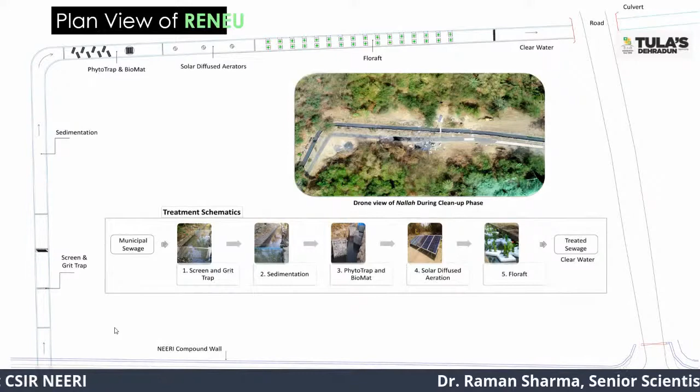And I would like to emphasize that when we talk about treating grey water, even in a sewage treatment plant, STP, you tend to remove the silt before it goes into the plant, because silt does not have any nutritive value. It's just an inert material that should be removed at the first instance, so that it does not put a burden onto the next operational units at an STP or even in the RENEU system.

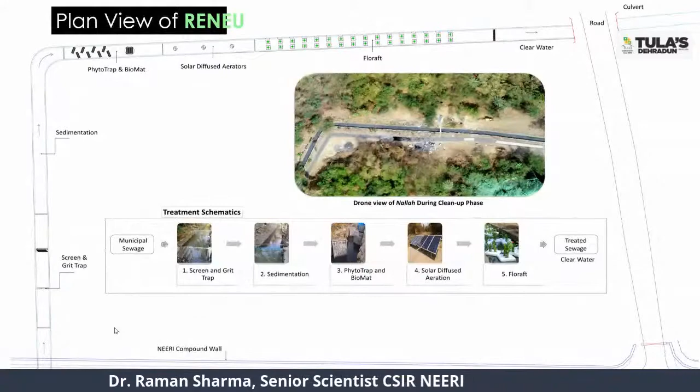So CSIR NEERI demonstrated this RENEU technology in its premises at Nagpur. CSIR NEERI has its head office at Nagpur, and there is one nala flowing inside the premises, and we demonstrated this RENEU technology inside our premises itself. This is the beginning of that nala before it enters near our office building, and you can see all kinds of solid waste being thrown into these nalas, which ultimately chokes them, which is not the behavior expected from the citizens of our country.

So let us talk about what we are proposing for a RENEU system in a demonstrative unit in our campus at Nagpur. This is the first physical operation: we have a screen cum grit trap. You can see our inclined screen has been put into the flow of water. So this screen and grit trap is the first unit for the RENEU.

The screen removes objects such as rags, paper, plastic, metals, and various floating matter to prevent clogging downstream of the treatment. As I reiterated before, these things do not have nutritive value, like plastic or rags or gutka packets. We need to remove them before they enter our treatment system. Coarse as well as fine screens are provided before the grit trap.

And this grit trap is combined with the screen operation, which removes grit from the flowing sewage and allows it to settle down. Grit includes silt, sand, cinder, or other heavy solid material heavier than water, and they settle down and we remove them at the first instance. So you can see the efficient operation of the screen: floating matter on the left, and water without the floating material is seen downstream of this screen.

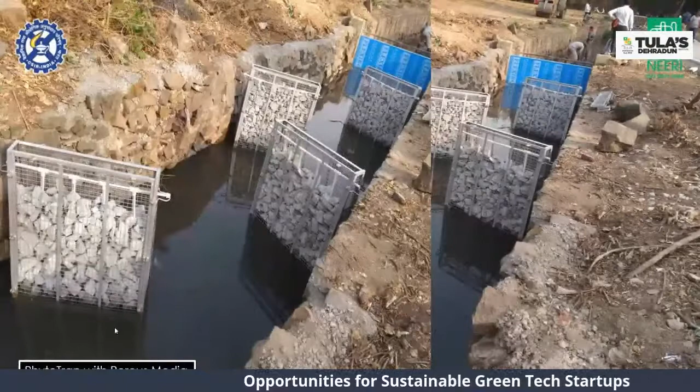And this is the picture of when we were putting up all this phytotrap system inside our drains. You can see the labor, the kind of module, the kind of stones which we are putting inside these phytotraps. And some more pictures of these phytotraps, how we have put it inside, how we have anchored these units with the wall of this drain.

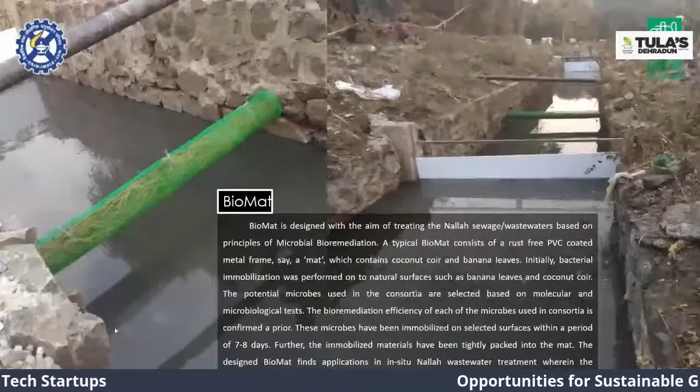So the next unit is a biomat. What is a biomat? Biomat is designed with the aim of treating the nala or sewage wastewater based on the principle of microbial bioremediation. A typical biomat consists of a rust-free PVC-coated metal frame, let's say a mat, which contains coconut coir and banana leaves. And initially, bacteria immobilization was performed on a natural surface, such as banana leaves and coconut coir.

The potential microbes used in the consortia are selected based on molecular and microbiological tests. The bioremediation efficiency of each of the microbes used in the consortia is confirmed a priori. These microbes have been immobilized on selected surfaces within a period of 7 to 8 days.

Further, the immobilized material has been tightly packed into the mat. The designed biomat finds application in situ nala wastewater treatment, wherein the microbes will use the organic matter of sewage as nutrients and thus treat the wastewater. I would like to emphasize that this biomat is optional, but when the BOD of that particular system is very high, we advocate the use of this biomat system to further improve the microbial population inside the sewage water, the grey water flowing inside.

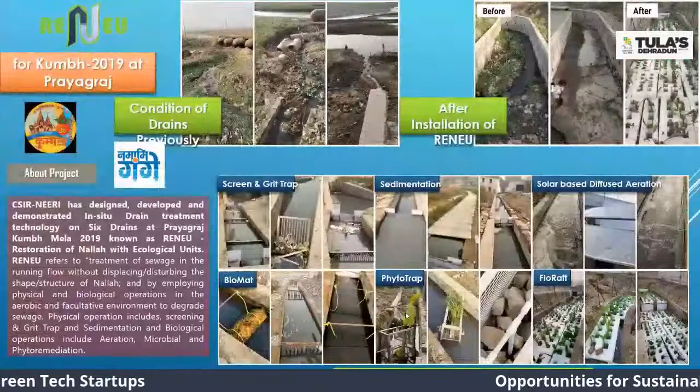So these are sets of pictures showing the untreated and treated water from those drains, along with the different phyto traps, solar diffused aeration systems, and similar elements, for the kind information of the audience listening to this lecture. We demonstrated this technology during the Kumbh 2019.

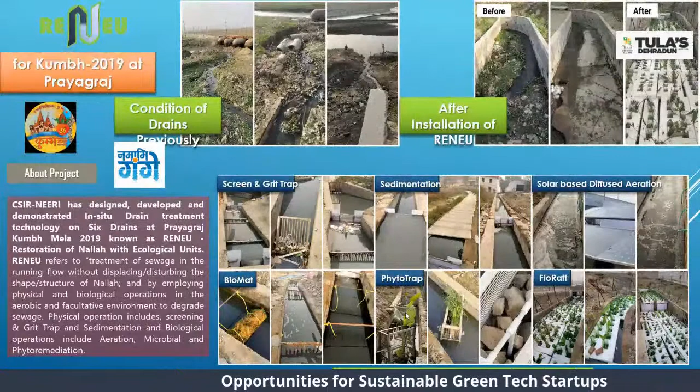Now let us talk about the advantages of this RENEU technology. I am making it very clear—I do not want to advocate that this RENEU technology is capable of doing everything. Just like any other technology, there are some positive and negative points associated with this particular RENEU technology. So I shall be talking to you about the positives, the advantages of this particular technology.

The first advantage: the system can achieve Nala wastewater treatment without the use of conventional STPs. I don't want to advocate that this is an alternative to the STP—all untreated grey water and black water should go to the sewage treatment plant for proper treatment, and only after treatment should the water be discharged into a stormwater drain or river. But if, for any reason, you don't have a dedicated sewage treatment plant in a particular rural or urban area, you can use this technology for treating the grey water flowing inside that drain.

In this case, no extra civil construction may be required, as the technology employs natural systems and relies on the flowing water channel. If the Nala is almost pakka (permanently constructed), you need to put some blocks for the phyto traps I was showing you. But if the Nala is totally kacha, only a very small amount of construction is needed at the place where you install this technological intervention. So you need not invest a large amount of money in civil construction for putting in this RENEU technology.

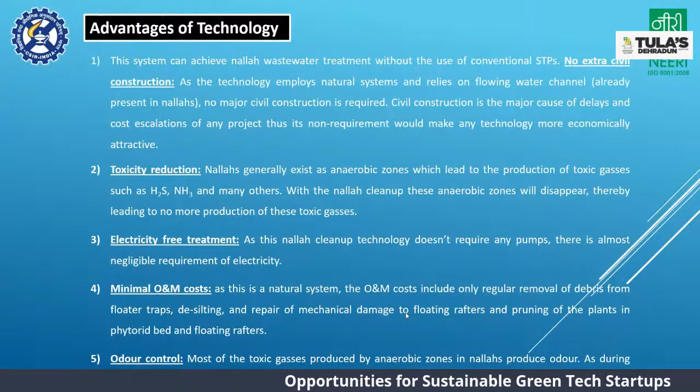So fourth, I would say the biggest advantage associated with this RENEU system is the very minimal operation and maintenance cost. You might have heard or read in the newspaper or print media that sewage treatment plants are not working.

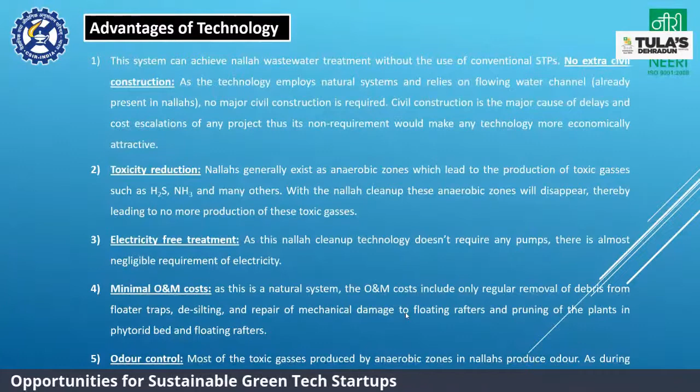Operation and maintenance for the municipal corporation or urban local bodies becomes very, very difficult. You need to put lots of money into them in the form of large electricity bills, chemical dosing, depending on the treatment regime at the STP or common effluent treatment plant. In this system, you need not put any chemicals—just with the help of plants and aeration, I would say a very minimum operation and maintenance is required for the RENEU system.

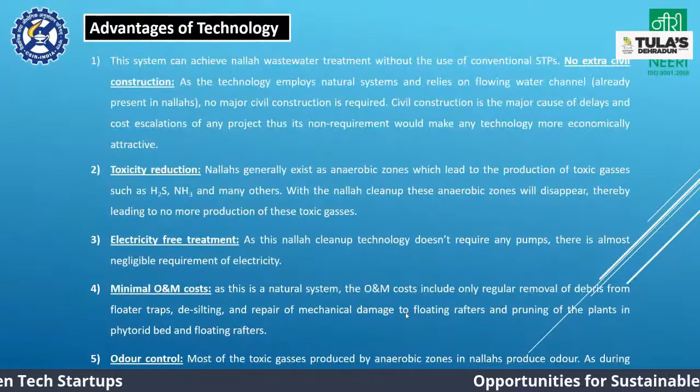Fifth, definitely odor control—when you control the gases, the odor problem gets minimized. The sixth and very important advantage is that the treatment is happening inside the running water.

You're not taking water somewhere, you're not obstructing it, you're not constructing any artificial dam or anything like that. Just naturally, as water is flowing, it is being treated. The seventh important point is reduction in mosquito propagation.

Eighth is the social invocation of the masses to support the nallah clean-up program. When you engage the public into this system, they become very sensitized to not throw plastic waste inside the stormwater drains, because that plastic waste would ultimately choke the treatment system being proposed.

The treatment system here involves plants that make the Nala look like a kind of botanical garden. So when people become sensitized, they themselves realize that this technology improves the aesthetics of nearby areas. That is a very good thing when people become sensitized and get involved in these kinds of activities.

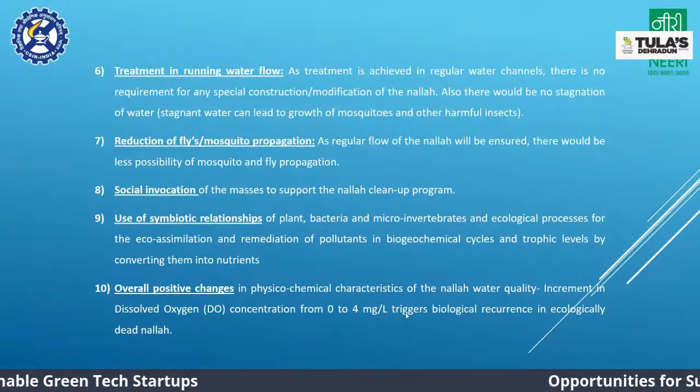Okay, so these are some of the positive changes associated with this RENEU system. Now let's talk about the operation and maintenance, and where you need to put your efforts for proper O&M of this RENEU system.

As I said before, the removal of debris and screening from screens and grit traps, desilting of grit traps, removal of scum, periodic cleaning of floater traps, maintaining uniform flow across the treatment system, and repair of physical damage to the floating rafters—these need to be repaired. Operational aspects also include harvesting of plants once every 6 months.

I showed you some pictures where Canna indica, the wetland species plants, have flourished very nicely. All these kinds of activities don't require any special skill—some unskilled labor can be appointed for maintenance, or I would rather say some sort of gardener can do all this periodic removal of things.

So no doubt the RENEU system is going to treat the water, but when the urban local body or municipal corporation appoints some labor for this, they would also find employment. So we also see this as a kind of employment generation—unskilled labor can get involved in this particular kind of activity.

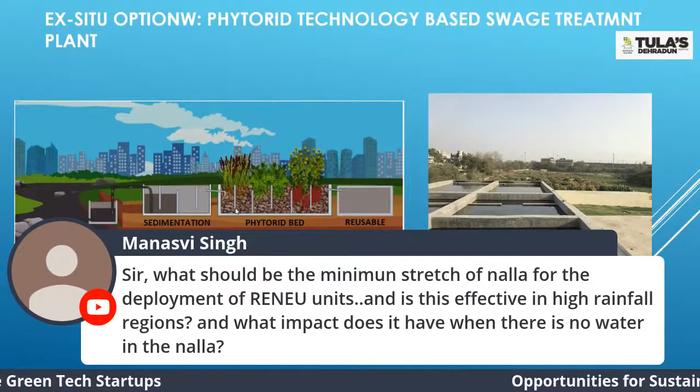For the kind information of all the audience, we can have one module, or we can have a number of modules at a particular span of a particular Nala. So there is no hard and fast rule that you need to have something like that. So but minimum, I would say that 200 meters, 300 meters, something like that, you need to have that. I hope I have answered your question, Manasvi.

So there is no hard and fast rule. If the water is more contaminated, you tend to have a longer stretch for the purpose of that particular unit. Not only one module, you can have multiple modules into this. So when I say that you need to have multiple modules, the cost of investment from the urban local bodies is also going to increase. So whenever we propose such kind of thing, we just optimize this stretch. So that is the way we go for this particular RENEU system.

Another question that has been asked, like rainwater harvesting, can grey water recycling be made compulsory in larger apartments and industrial establishments? What is the scope of it in the individual home? I think Mr. Mohanji has asked this question. I think it's a very good thing, like rainwater.

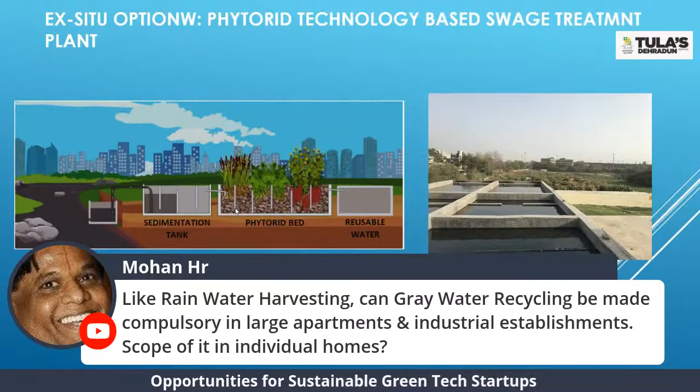But as a technical person, I would say that when we say grey water after treatment, you have to reuse it. And there is no surety when you need to have a strong quality check. No doubt, the urban local body or wherever the municipal corporation, they're going to put it up. And there are some good examples also where people are reusing it. If government makes it compulsory, the first thing the government needs to ensure is the treatment system, be it a phytorid system, be it a RENEU system, or another conventional wastewater treatment system, the quality of the water should be according to the discharge standard.

Once that has been achieved, then you can use that particular water, at least for horticulture purposes. For the kind information of Mohanji, I would like to mention that Delhi has a very enthusiastic plan for the same kind of thing. The Honorable NGT is discouraging the use of groundwater in the parks of Delhi. They are requesting that the parks or the urban local bodies or the resident welfare associations should put these kinds of phytorid technology-based small systems inside their parks, take up the grey water, treat that particular water in the phytorid bed, and use that for horticulture purposes.

So that is something which is happening at least in the national capital region, that you should use your grey water, because water is everywhere. You see that the agency responsible for collecting this grey water is finding it very difficult. From here and there, you see news that they are just overflowing. So once you start to take up that particular grey water, treat it and use it for the green covers etc., you will be doing a great service to nature by not extracting clean fresh water from the ground itself. So that is something, Mohanji, I would like to add. So there is a requirement that we should use our grey water for this. I hope I have answered this particular question.

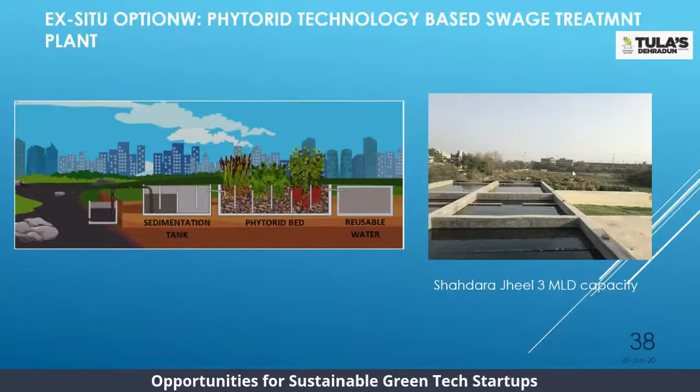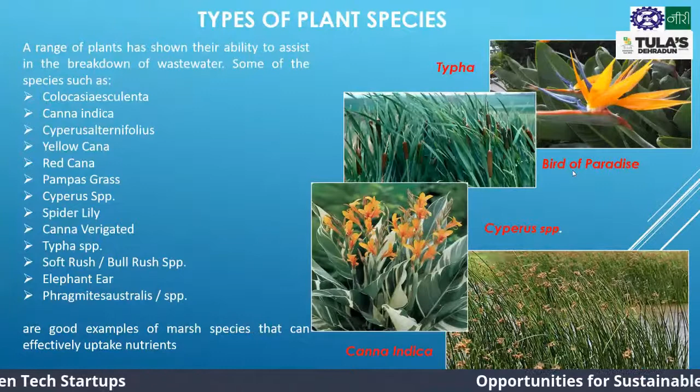So now you must be wondering what different plant species we can use for this purpose. So here's a list of some of the plant species which we advocate. In fact, we have used them in different phytorid systems. These are Typha, bird of paradise, Cyperus, Canna indica. These are the botanical names put over here. We very nicely use this Canna indica. I think most of our places have Canna indica and Cyperus. So these are the wetland species plants that we are using.

Now, let us talk about where we have used this phytorid technology and how we have used it for the rejuvenation of this water body. At the beginning of my presentation, I mentioned that we are working on this 29 water bodies project. And in this project, the irrigation and flood control department asked us to rejuvenate the water bodies. I showed you this water body of Hamidpur at the beginning. So how we are proposing this rejuvenation is something I'm going to show you.

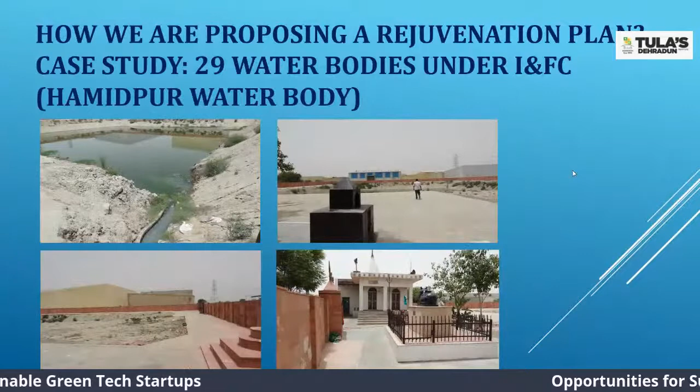So this is our site where the water body is. This particular water body is in the vicinity of a temple, and a proper boundary wall is there. You can see in the pictures that there is some free space available. So now I am going to tell you how, with the help of phytorid technology, we are going to rejuvenate this water body inside the premises of this temple. So what CSIR NEERI has done: first of all, we saw the physical location of this Hamidpur water body. From the Google map, you can see these are the boundaries of this particular water body.

There's a temple, and this whole particular area is the area of the water body. In the vicinity of that, a walkway is there. And also behind the temple, some space is available.

Okay. So we did the survey of this particular Hamidpur water body, because when you need to propose a rejuvenation plan for a particular site, you carry out the survey. During the survey, you see what the lat long is, where it is located, and what kind of area is available. So we see what the wet area of the water body is, what the dry area in the vicinity of the water body is, a general description, and the way this water body is being used by the villagers.

During the survey, we found that in many places in the rural area of Delhi, villagers are very happily taking their cattle to the water body for bathing. So when the government of Delhi says they want to rejuvenate, they put a lot of money into that, and then if villagers bring their cattle into it for bathing, the whole of the money is going to get wasted.

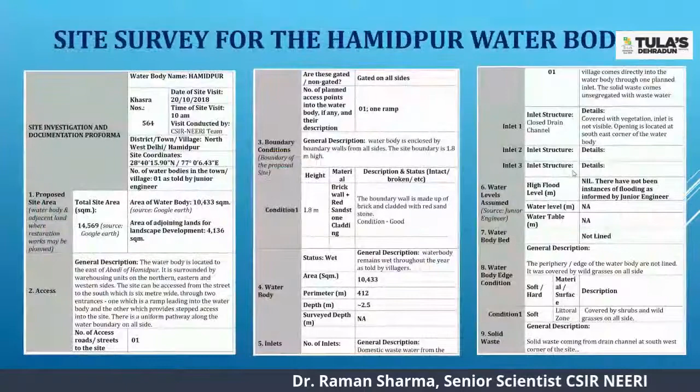All right. So I will be moving further. So the Google map is there. Then we have carried out the survey of this. So we gather all the bits and pieces of the different kinds of things that are there. We also do the water quality analysis of that particular water body, because we need to see whether grey water is coming there or some sort of industrial wastewater is coming to that area.

If industrial wastewater is coming to that particular area, we inform the local authorities that some unrecognized industries are operating there which do not have an effluent treatment plant. So that's a kind of check also. We do not penalize the people there, but just let them follow the SOP: if you have a polluting industry, you need to have an effluent treatment plant.

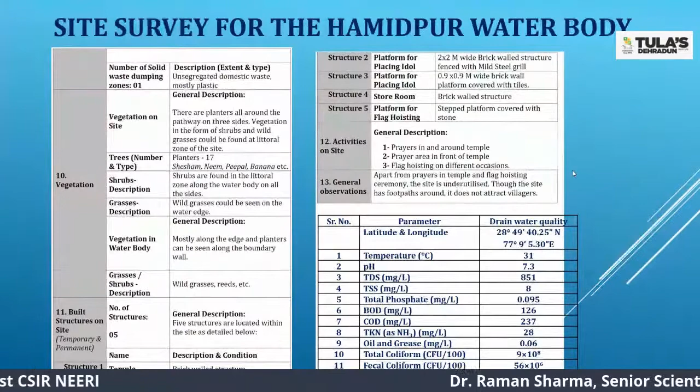And depending upon the guidelines that have been issued to a particular industry, you need to put up that kind of effluent treatment plant. So we do all these kinds of water quality analysis of that particular water body.

Okay. After that, we carry out the topographic survey of that particular water body, and we try to see what are the different physical characteristics of that particular area. So this is some kind of a contour map. It also lets you know what is the depth of that particular water body. Many a times, agencies request us that you need to increase the depth of that particular water body.

So once we carry out the survey of that particular water body, we come to know whether it's 2 meter, 3 meter. If the agency wants this particular water body to be made a little deeper, let's say 5 meters, 6 meters, then you need to propose this kind of deepening of this particular water body. Some dredging you need to propose. So that's why you need to carry out the topographic survey of that particular water body.

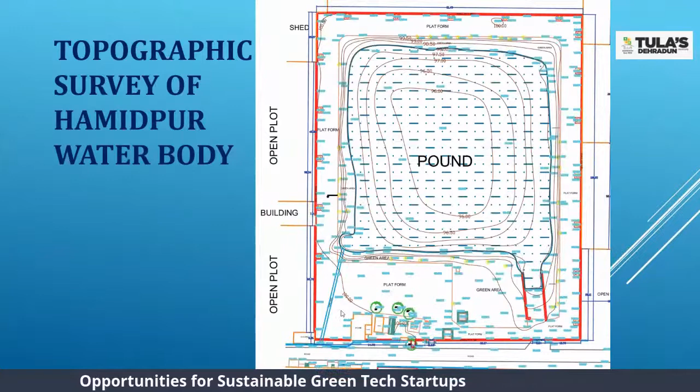So we saw in this particular slide that there is some small area available for the construction of this phytorid technology bed. We also saw how much quantity of wastewater is flowing into this particular pond. So based upon that, we found that a 150 kiloliter per day capacity phytorid technology based sewage treatment plant would be very much sufficient for this particular site. So we designed that particular phytorid bed.

You can see over there, you have a screen, the same characteristic features which I was telling you. You need to have a sump well, you need to have a sedimentation tank, and then you need to have a phytorid technology based STP. And then the treated water from this particular sewage treatment plant will ultimately be discharged into this particular water body.

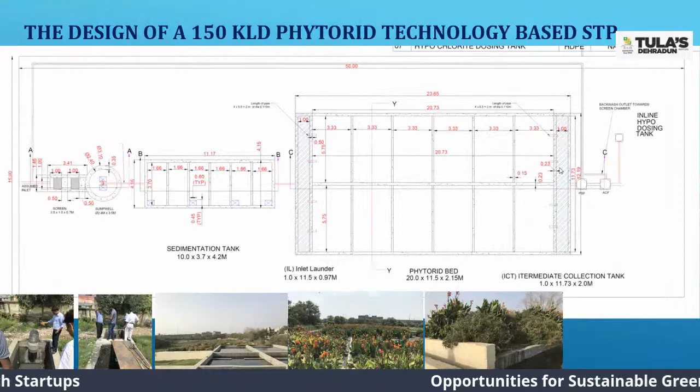So in place of untreated water being discharged into this particular pond, we are diverting that untreated grey water through the phytorid technology based sewage treatment plant, and after treatment that water will flow into this particular pond. So the complaint of the local citizens who were coming to the temple for worshipping, that this particular pond is stinking, would be eradicated slowly when the clean water is discharged into this particular water body.

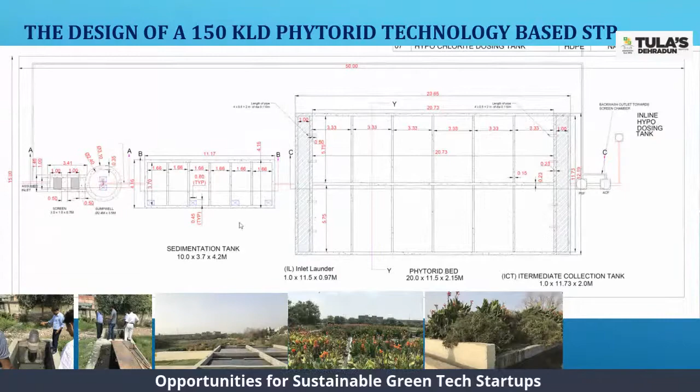Now the next task is going to be how you're going to fit this particular STP into the vicinity of that particular water body. So when I say screen, you can see the picture of this screen, and these pictures have been taken from our 3 MLD phytorid technology based sewage treatment plant at the Shahdara Lake. This particular Shahdara Lake is in the East Delhi Municipal Corporation. This particular plant is working very, very efficiently.

And if somebody is interested to see how a phytorid technology based STP looks, they are very welcome to visit this particular STP. This Shahdara Lake is near the Welcome metro station. So if you are familiar with Delhi, you know that there is a metro system. If you want to reach this Shahdara Lake site, you need to travel up to the Welcome metro station, ask anybody about the Shahdara Lake and go there. It's open to the public.

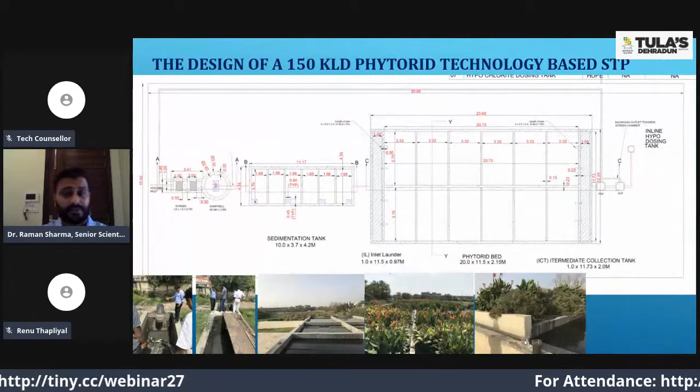Okay, so now you can see in the next picture how we have fitted this STP without compromising the temple, without compromising the surface area of that particular water body. So the STP has been very nicely fitted in. So I would say that it's not an STP. Close to 65% of this construction is going to have plants, so it's going to improve the aesthetic beauty. It's not an STP, it's a kind of park area which you're going to develop in the vicinity of that particular water body.

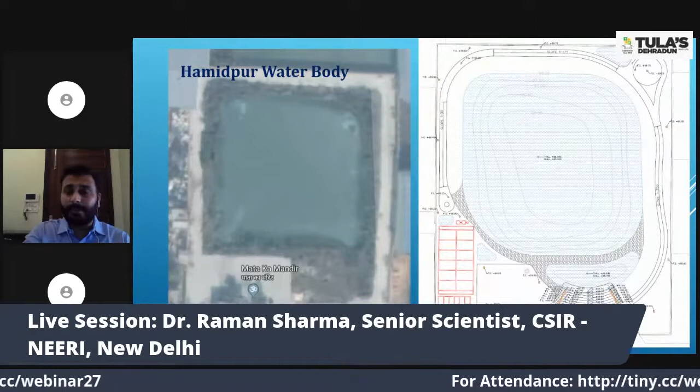All right, so this is the water body on the left-hand side. On the right-hand side, this is the landscaping or development plan of the Hamidpur water body. This red color area, these red lines, this is the STP which we are proposing in the vicinity of this particular water body.

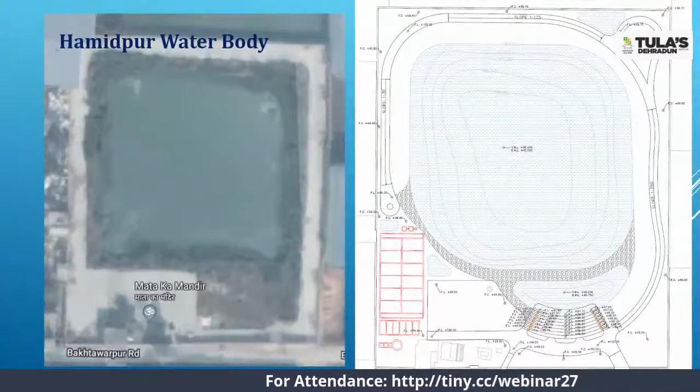When I say the rejuvenation of the lake, you need to make available a continued water supply for that particular lake. Because if the bottom of that particular lake is totally porous, however much water you put there, that water is ultimately going to percolate down.

So when I say that CSIR NEERI is doing the rejuvenation of this particular lake, I would say that CSIR NEERI is making a plan in which clean water would be made available for this particular lake. Once the clean water has been made available, then you develop that particular lake area as a kind of recreational area.

People can come over here and sit, relax, and see the beauty of that particular lake area. And when people are using or coming to that place, the urban local body or the municipal corporation of that area can put some sort of small fee also, so that some money can also be collected for the upkeep of this plant.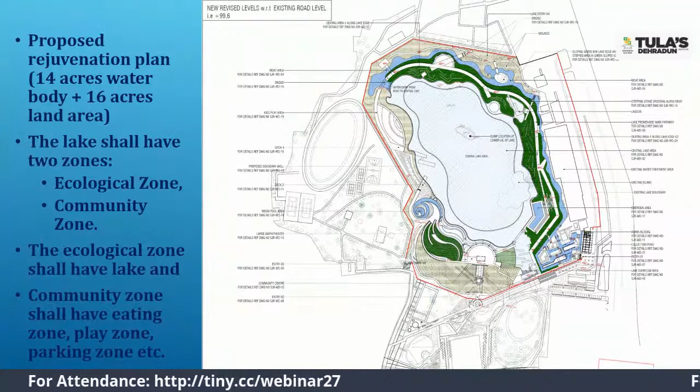By the way, for the kind information of the audience, the construction work is already underway at this particular lakeside. Unfortunately, because of this lockdown, because of the coronavirus pandemic, the work was supposed to be halted because everything was stopped as mandated by the central government of India.

And another beautiful project that we have recently undertaken last year, in association with Delhi Tourism.

And another question has been asked by Mr. Anuj Thapliyal ji - a great way of presentation, sir. I just want to ask, is wastewater from tannery, sugar and dairy industry can come under grey water, and how eradication of toxic microbes takes place?

Well, I would say that grey water is not the water coming from tannery, sugar and dairy industry. These tannery, sugar and dairy industries have very, very high BOD and COD also, and this is going to be industrial wastewater, it is not grey water. Grey water, I would like to say, is water coming from the residential area, from the homes etc. So at the beginning of the lecture, when I was saying that from the residential area, the water from the kitchen, from the bathing area, which is flowing inside the drains - that is something we are talking about. And the tannery, sugar, and dairy industries need to have a dedicated water treatment plant, a common effluent treatment plant, where you're going to remove all these kinds of toxins.

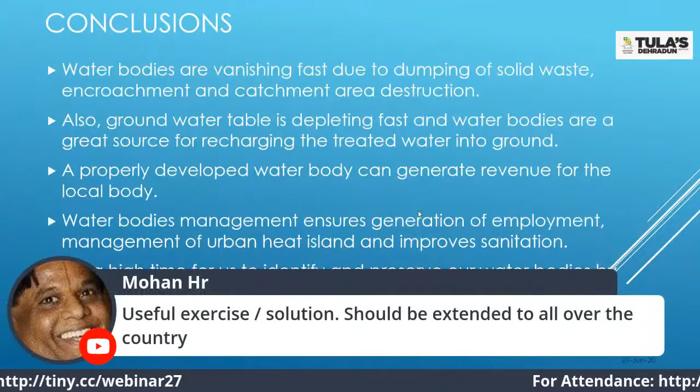Another question. Mr. Mohanji has asked that the useful exercise solution should be extended all over the country. For his kind information, we are already in talks with lots of municipal corporations. For the kind information of my other audiences, we have constructed close to 300 phytorid technology-based sewage treatment plants all over India, with many more in the pipeline. We are also in talks with many urban local bodies and municipal corporations for implementation of this RENU system. So we are already in talks with all the agencies for the implementation of these kinds of technological interventions. That is the answer for Mohanji.

Anuji has again asked, by toxic microbes, I mean microorganisms present in water bodies causing contamination. Yes, Anuji, this is a very good question. When we say we want to treat the water, even when water is flowing inside this RENU system, the Nala system I am referring to, after all the technological intervention, you can make a kind of chamber where you can carry out some disinfection.

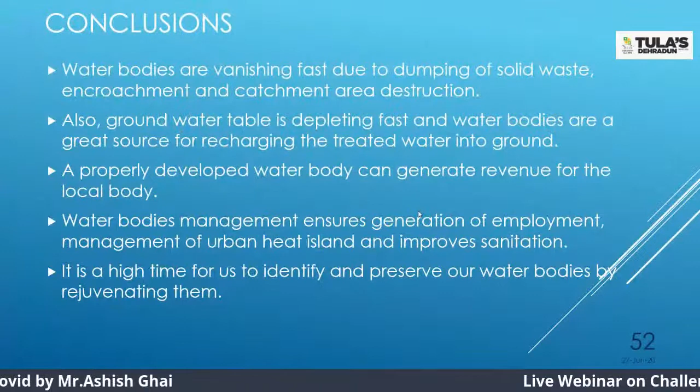Or if you have a large amount of money, you can lift that particular water and provide a sophisticated disinfection system, just like ultraviolet UV radiation. The Shahadra Jheel project, which I was discussing with you and showing different pictures of, there we have proposed UV radiation for killing microorganisms, either from the RENU system or even after treatment from the STP system. You need to propose some sort of disinfection. But Anuji, I would like to emphasize that when you put some sort of disinfection system, you want to make sure you use that particular water in a more sophisticated manner.

Generally, whenever water is available after treatment from an STP or from the RENU system, you put it to use for horticulture purposes. So sometimes agencies say, why invest so much money in eradicating or disinfecting to kill the toxic microorganisms Anuji is talking about. It depends upon the agency. If they want, disinfection can be proposed to kill the microbes. If money is constrained, sometimes people say, okay, refrain from doing the disinfection. That is what I would like to answer to you, Anuji.

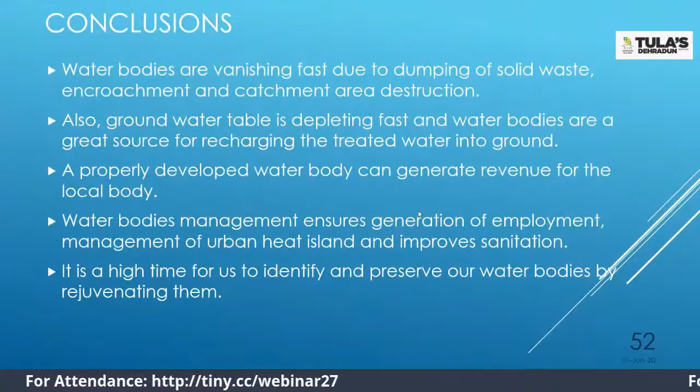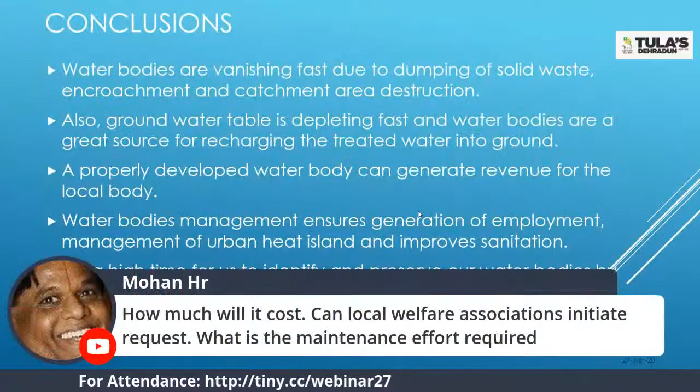Mohanji has asked another question: can a local welfare association initiate a request? Of course, Mohanji, urban local bodies can initiate a request. I can tell you the modus operandi here in Delhi. In Delhi, we have the Delhi Parks and Garden Society, DPGS. The urban local bodies approach that nodal agency, telling them they need to construct a particular capacity of phytotechnology-based STP. We would then execute it, because if everybody starts approaching CSIR NEERI directly, we will not be able to address the great demand coming from all the urban local bodies. So it's always good that CSIR NEERI stays in touch with a nodal agency, say from Uttarakhand, and all requests from Uttarakhand are diverted to that nodal agency. That nodal agency approaches CSIR NEERI, and in that manner, Mohanji, that kind of work can be executed.

Another question is being asked by Mr. Shadesh Kumar Chaurasia ji: what techniques can we use to detect heavy metals in a water body sample, other than AAS? Well, at CSIR NEERI, we have another system, though I've forgotten its name. That kind of system is there, it's just not coming to my mind right now. Besides atomic absorption, there are other systems also, like chromatography.

It will come to my mind. I will answer you, Mr. Chaurasia. You need to take the sample, digest it, and then put that water sample into the instrument, which will let you know the heavy metal ion concentration. It will come to my mind, I just have to recall which system it is. So that is the answer for Mr. Chaurasia ji.

Coming to another conclusion: a properly developed water body can generate revenue for the local body. This revenue generation model is essential. Many times agencies like CSIR NEERI propose a rejuvenation plan or construct something, but after some time, because of shortage of funds, the agency may not be able to run that technology. So we need a revenue model. In this model, when a person comes to visit that developed water body site, they pay, say, 50 or 100 rupees to the urban local body maintaining it. It's high time for all urban local bodies or municipal corporations to put up this revenue model, because otherwise, once you develop things, they may not sustain.

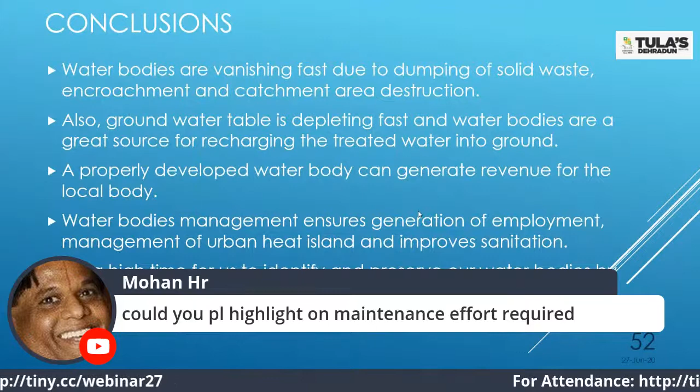So it's a very high time for us to identify and preserve our water bodies using these green technologies, be it RENU systems, phyto-technology based STP systems, or floating raft systems. I have shown you some of the projects we have demonstrated.

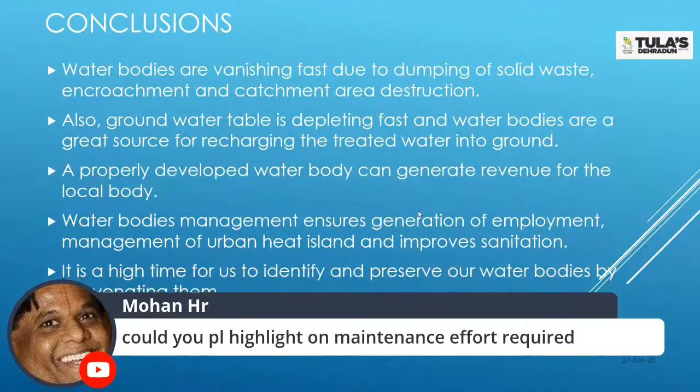If you have more queries or want to approach CSIR NEERI, I will share my email ID: raman.sharma@neeri.res.in. Please feel free to drop a query regarding this. We would be very happy to discuss these technologies with you and how we can transfer or design a suitable system for you.

So here I stop. I hope it's something like 2:37, time is almost there. I would be very happy if my audience has more questions for me.